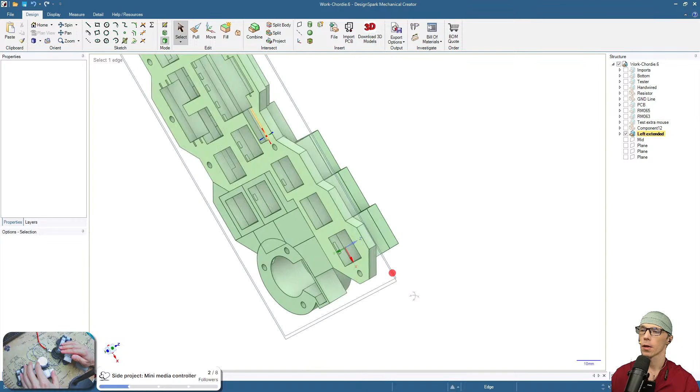Another thing is that previously we've been working on new Chordie, new shell. So we did some changes to the left side. We have added these two keys for the mouse, because up until now the mouse keys were over here under the thumb like this, and after some time the thumb can be sore, especially if you do a lot of mouse operations. So I decided to move it, to add those two keys,

and that's the next prototype, or maybe even final version, if all those fit and there are no issues, like no space constraints, and if it's okay to use the forefinger for that. Looking at it, it should be okay, but you never know until you build it.

But there is one more thing which might be problematic, and this thing is this. Let me show you quickly, this little fella. So this is the encoder. I just dropped it like Linus. So these are very nice, and you can find them in many builds. A lot of people are using these encoders, and I've been using it for quite some time. Well, back in the day, they were abundant, and there was quite a lot of them.

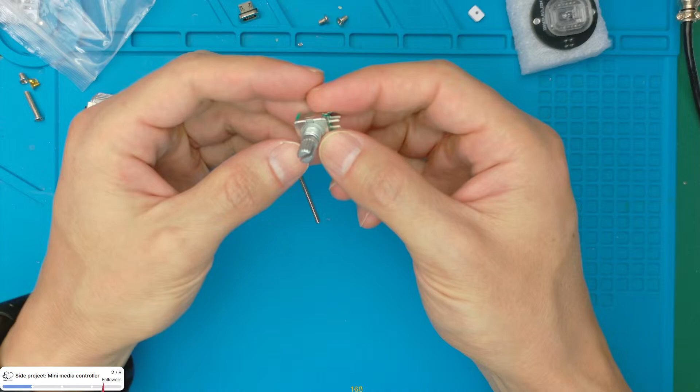So the first one will be this. So this is a simple rotary encoder, just like the normal ones, just that this one is 90 degrees. So as you can see, it looks like this. And you can buy such a knob. There is a bolt inside, and you can attach it to the stem.

Like so. And just tighten it, and that's it. It looks okay, but first of all, it's kind of too big compared to the original. As you can see, the knob is kind of big. But we can either 3D print something, or maybe we'll be able to find smaller knobs to substitute this one.

So that's one thing. And another thing, there are other encoders like this. Maybe not quite like this, but with a small footprint like this one. So I was thinking, maybe if we can somehow find a way to attach it like 90 degrees, and then have some kind of a knob that will go on it. That would be okay as well.

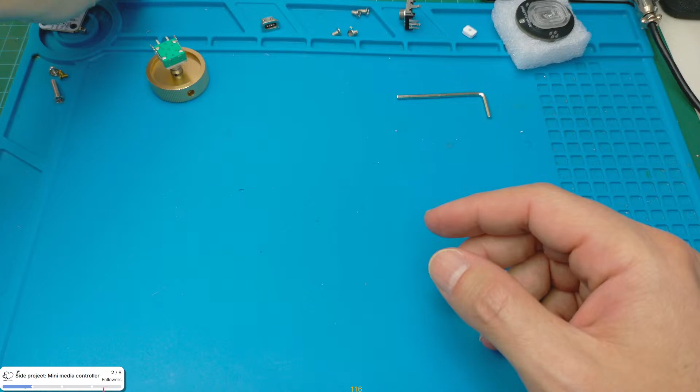And there is one more thing, well, actually two. So you can still get these. So this is like a bigger version of the horizontal one. So actually it's like twice the size. It's very nice, just like this one. But this looks also like an old tech, and I think they will also be gone soon. But the good thing about them is that they are still a good price, the same price as these ones when they were new, or maybe when they started being sold.

And the last thing that I have found is this. So this is some kind of an IC chip that can detect how this magnet is rotated. So if we had it somewhere underneath and a magnet attached to something that can rotate, then this thing can read the rotation of the magnet and could give us a good result. I think it's more accurate than any of these encoders.

This solution sounds like it might be the best one, the most sophisticated and maybe the most accurate. But the issue with it is that, again, we still don't know how long these PCBs will be on sale. And another thing is that it adds complexity. So even though I really would like to have that, I think I will skip this device.

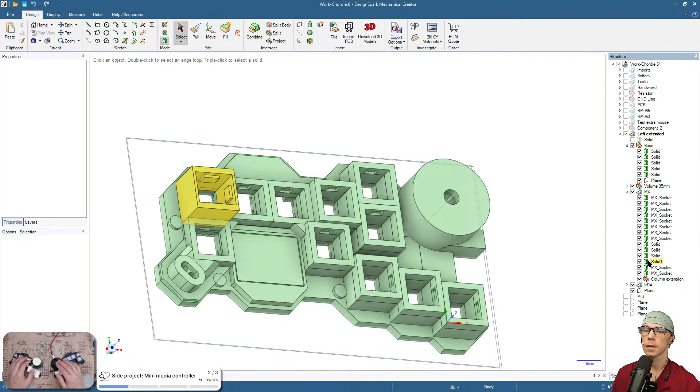So how can we approach this now? Because we'll have to replace this part. Okay, so encoder is here. Maybe I will change it to, so the name was EC11. Let's make it A because it's angled. And I will make it 12.1 by 12.1. And the height was 6.5.

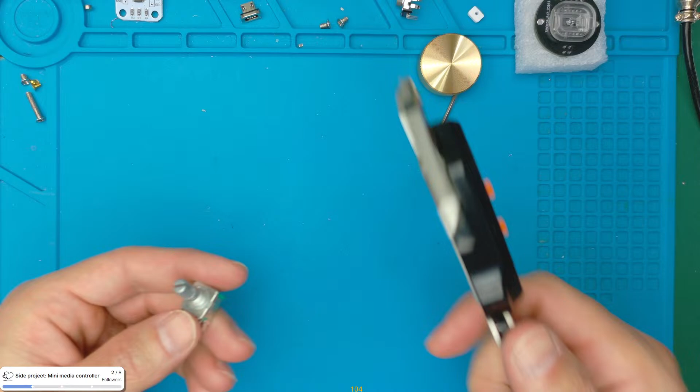And then we make the stem. So this one was 7. How tall was it? Should be 11 or 15. Well, maybe I didn't buy 11. Let's check what's the height on AliExpress. Let's make it 15 for now. No, this is 7. And we can pull it out for 15. Ah, yes, 15. Okay, so I guess that's the smallest one. Maybe we can merge. Ah, it is one body, so that's fine.

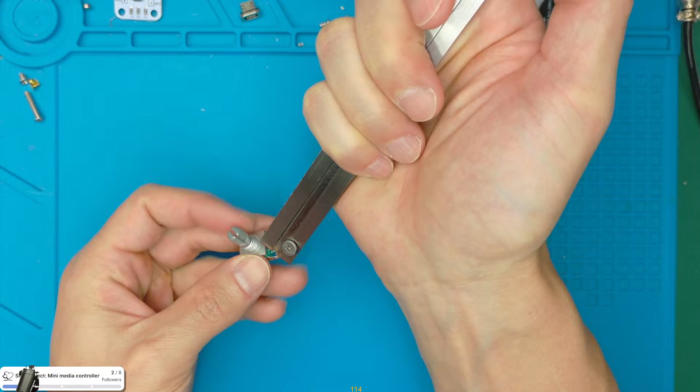Yeah, so as you can see, it's quite big. And we still haven't factored in the legs. It's 4.1. So it looks like one is in the center, like one row. So over here, the middle row is centered, at least it looks like it. And then we have two legs at the back.

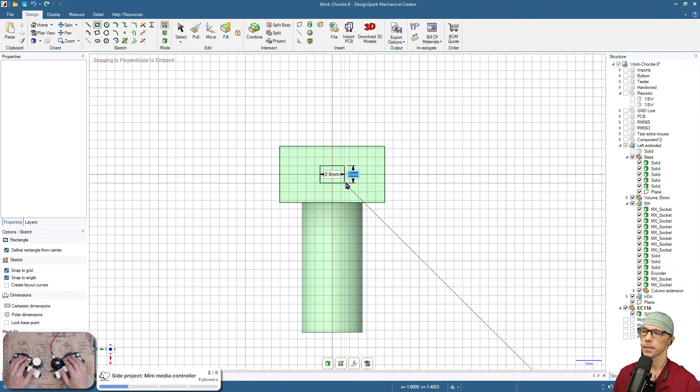Okay, so the legs are 0.8 by 0.2. So we can make a rectangle from the center. So we have, this is 0.8 and this is 0.2. Looks about right. And how tall? 4 millimeters. And what is the distance? It's standard 1.7. 1.7.

Okay, looks like it merged the leg with the whole body, and I don't want that, but that's an easy fix. I can just select this wall, put a plane on it, and then I can cut the body. So I'll cut the whole body with this plane, and this will effectively chop off the leg. So I can remove the plane now.

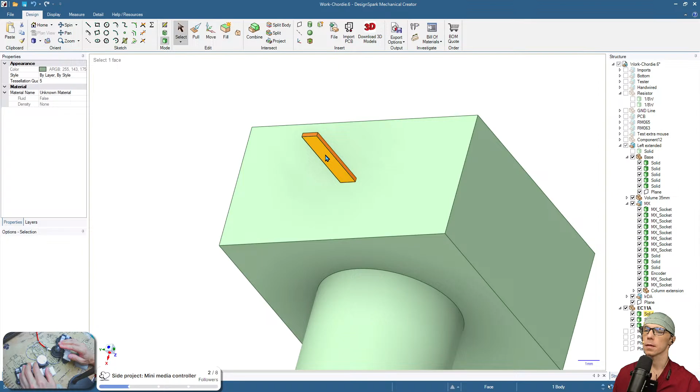So I copy and paste, and now I can move it over here and just do anchor on this wall, and I want it to be 1.7 away from this wall. And one more. And the same, I can just make it move, anchor on the side, and I can use the ruler, and I want it to be away from this wall, 1.7. Okay, we have beautiful legs.

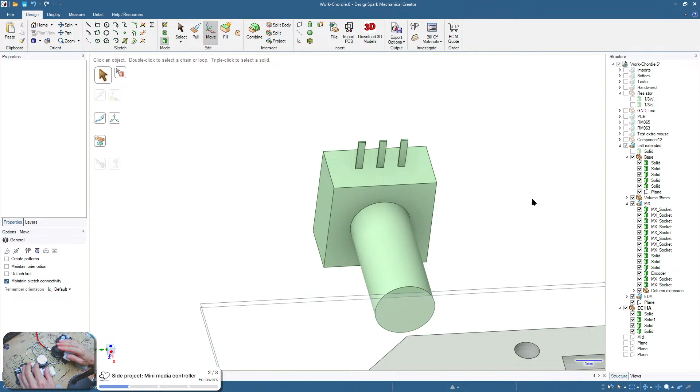And then we have one more set at the back. We have two, and they are aligned. So we have to model these two at the back. What they are aligned with and how far are they. Looks like it's 0.8. Okay, so select this one and this one. I can move them away and then anchor on this wall. Just move them back a little. And I want it to be 0.8 away from here. So it's 0.8. Okay, looks about right.

And then we still have these legs on the sides that are meant to keep the encoder in place. So I think I will make them as well. Looks like it's 2.1. Maybe 2. Oh, it's 2 millimeters. I wonder if this is bigger. Oh, it's 2. Okay, so we have 2 millimeters. And the shape.

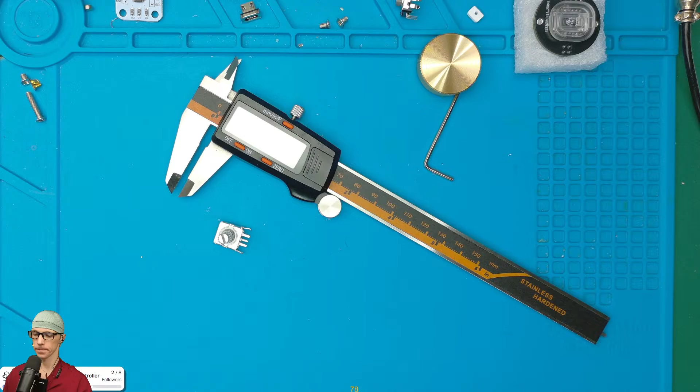And now I can cut with the letter T, or this one, trim away, actually not cut. Sorry, wrong screen. So I just made this shape with a rectangle, and then I just trim away this wall. So we'll see what will come out of it. And what was the thickness? We can make it 0.4.

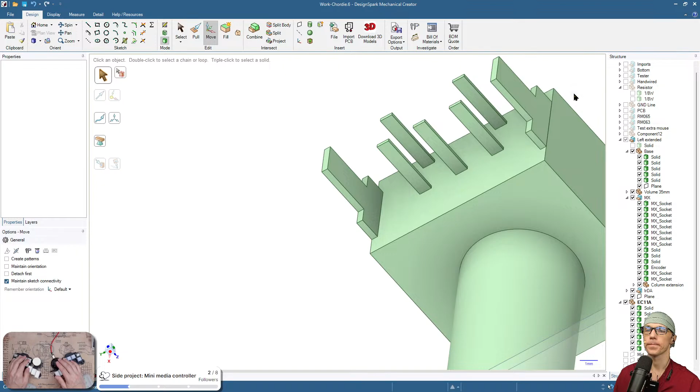Copy and paste and just move it away. Align this wall to this one. Okay, so you have a beautiful encoder.

Before we proceed, maybe you can take a look on AliExpress if they have any interesting knobs for this thing. So let's do rotary encoder and knob. Would be good to have something small with a small diameter. So it looks like this knob is 6 millimeters by 20 millimeters.

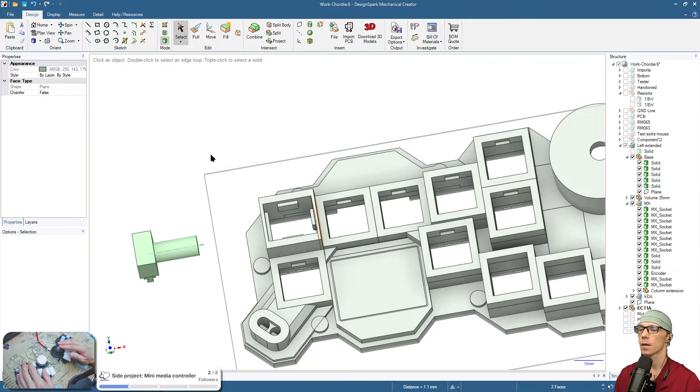But I think the wall over here is rather thin. Yeah, 1.1. And I usually do walls 1.2, but yeah, there was not enough space. And I think here's the same, yes, 1.1. Okay, anyway, so we have this one, 6 millimeters by 20. Maybe we can find something more interesting.

Oh, these are rather big, 25 by 13. So no. How about these? Okay, the smallest one is 20 by 15. Oh, they look nice. And they have this, I don't know how to call it, this engraving on the side that would be good for scrolling. The finger will stick nicely to it.

15 mm. But no, it's not that bad. But 20, so it's 20 by 15. 15 is height. And I guess 20 is the diameter. Okay, so the shaft is 6 mm and the height is 20. But how big is the whole thing? It would be nice if they had more info. Yeah, so the thread diameter is 6.8, height is 20.

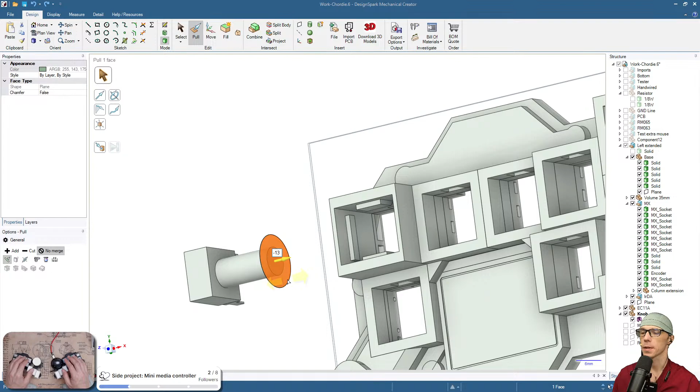Okay, we can do it over here on this one. Let's zoom in a little. So it was 13. Minus 13. Okay, not bad. Not bad. Of course, it will be sticking out a little. I doubt they mention how deep it is.

So it also comes with a screw on the side, like the one that I showed you. Like this one, but that's a smaller one. I mean, this one is bigger, but the one we're looking at is a smaller one. Maybe I will put it inside the encoder, so that will be easier to move. Okay, so let's hide this one, the socket for the encoder.

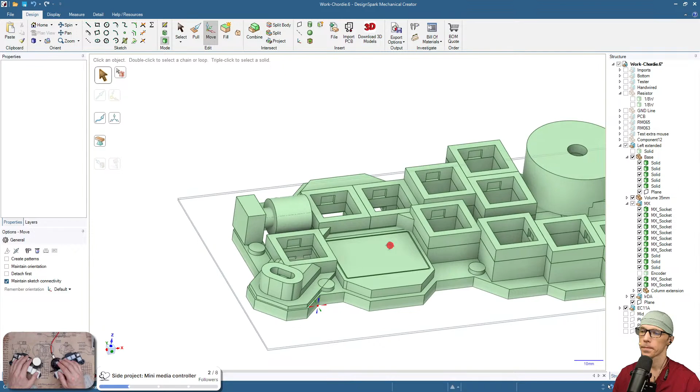So I would like to have this one in its position, but I would like it to be, let's make it 1.2. So 1.2, that will be the wall. And from the wall, maybe we can do it 1.4 in total. So that will be 0.2 away from the wall. It looks like we'll have to do a lot of adjustments to the base plate.

Well, actually, you can make it look a bit symmetric. So we have infrared sticking out here, and then we can make this one sticking out here. So this will look like Mickey Mouse ears or something like that. And we will leave this space empty. So maybe it won't look that bad.

But still we have to figure out a way to mount it. Well, technically, we can push it from the bottom and make it clip in with those legs. And then when the bottom plate comes in, it will lock it. So then even if there is pressure from the top, it won't push it out. Or maybe, so we have like two options, or maybe even more than two.

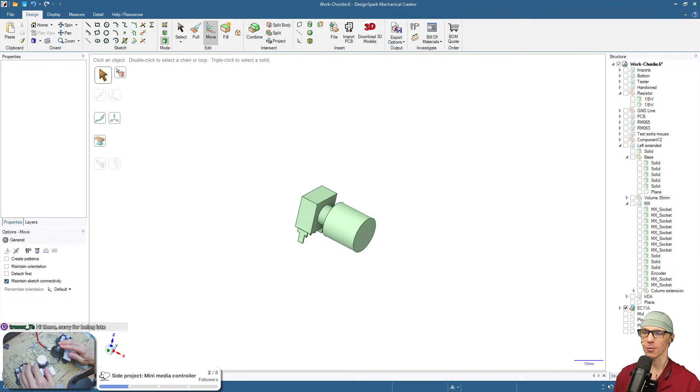Okay, so there is also the shaft over here. So we need a way to mount it somehow. It would be best if we had like a wall with a hole where we can put it, because these usually come with like a screw on top, so we can lock it inside the wall. But then it will be difficult to make enough space to push it up.

I can quickly make a mock-up, maybe. It will be easier to show. So if I copy this wall and this one, and copy this one, just to show you what I mean. Yeah, so it would be best to have a wall like this, where the shaft will go through. This will lock it in place. But then, of course, we will need a lot of space over here to be able to push it inside. So obviously we can't have that.

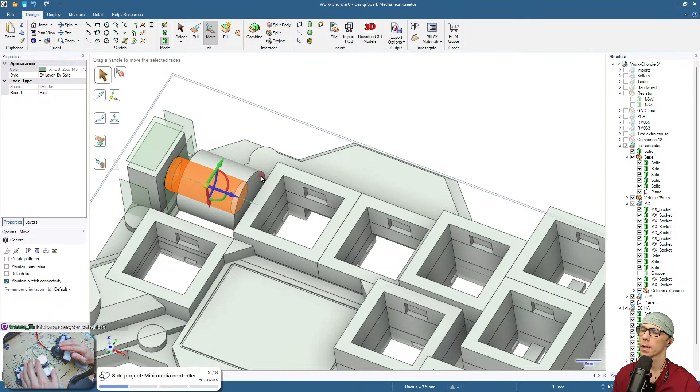So pushing it from the bottom seems like the best idea, at least the best I can think of at this moment. Most probably when I sleep on it, I will have an epiphany, and then on Monday we will redo everything. But for now, I think that's a good option.

Especially with those legs at the bottom on the sides. They would maybe help to lock it in. And then we can add additional constraint with the bottom plate. So that would keep it in place. Because when we will be scrolling, there will be a lot of force. And most probably it will still be able to crook it a little.

So I guess we can't get away without having a hole for it. Well, we can try. We can do a first mock-up without the hole, just to try to slide it in and see if it locks and how sturdy it is. So I will hide everything else.

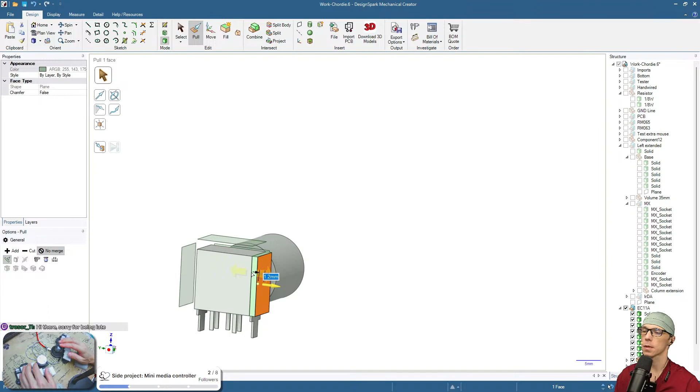I will remove that, and I will just copy and paste this one, move it, and just make it away 0.005, like this. Okay, this one. Let's make it 0.005 as well. And pull it all the way to here, and the other side as well. Okay, and now this wall.

And we can make one big rectangle over here. Okay, I think it made all the surfaces separately. That's not what I wanted. This surface, I don't think we'll be needing it. Oh, I will leave it for now. It won't hurt. Because this is all 3 different bodies, so if I make a surface here, it will only cover this area.

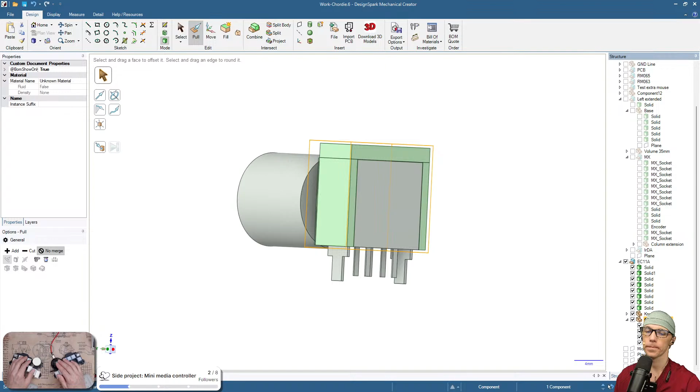And if I want to have it above all of these, I can make a new component. Like so. And now I can just do a rectangle from here to here. Well, actually, maybe I can go all the way to the bottom to accommodate the legs. Okay, we'll see how it goes. I make it 1.2. And I think I still have to move it minus 0.005 to leave some space.

Now I don't have to activate these. I can just move these walls. So I can do up to here and it's fine. And it won't bind them together.

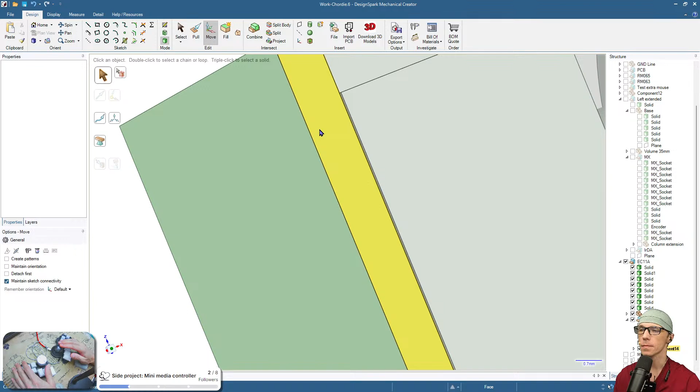How was your day, Trezor? Busy at work that you're late today? Oh, day off. That's nice. So what can be better than Friday? Day off on Friday.

Okay, I will extend this as well.

No, night shift? I don't think so. I'm not a fan of night shifts. They will always mess you up. Difficult to get back to a normal rhythm after a night shift.

Okay, so we have these legs, and they have this bump over here, this one. So I was thinking, if we make a hole, maybe it will lock in inside. Not quite sure how tall it is. This is 3.4. Okay, we have to extend this maybe by, let's see, 1.2. Looks like it's gonna be enough. And this one as well.

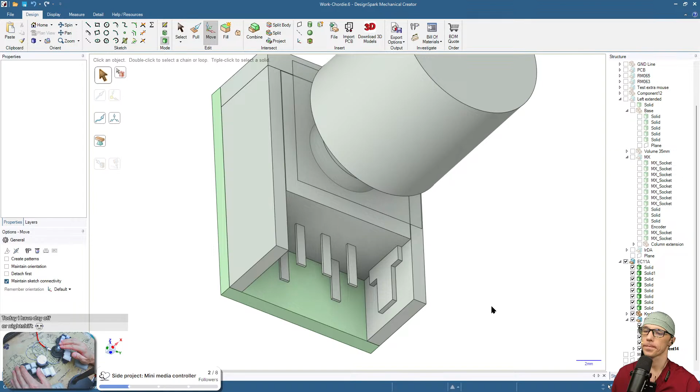Okay. So maybe now I can do it like this. Enable the whole body. And maybe we can cut a hole to fit this inside. So it will kind of clip in, hopefully. We can give it some more space. Okay, it's not touching. So we don't know how far it is.

But that's not a problem, because what we can do, I can hold Control, select this wall, and then I can project it. This is project to sketch, and this project is a different one. This one is when we are on a sketch, and this one is for 3D bodies. So we already have the wall we want to project. Now we have to select the target face. I want this one, and then hit OK, and then we can proceed.

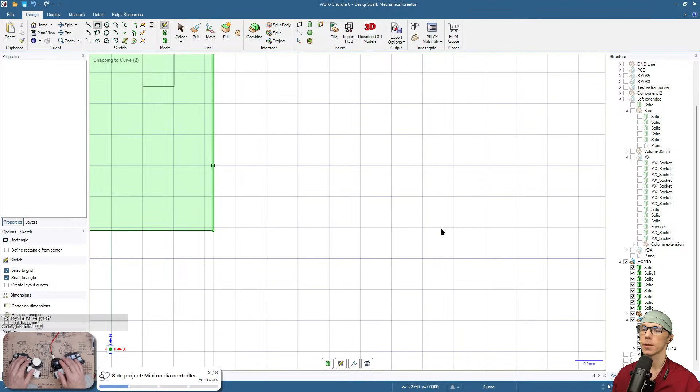Oh, there you go. Okay, so this is a one-to-one shape. So we need a little bit of a margin around, and I can do it with this tool. We can offset. So if I double click, why can't I edit this?

Let's hide this one for a second. How did it project? Oh, no, looks okay. Let's do it again. Can I select this? No. I wonder what's wrong.

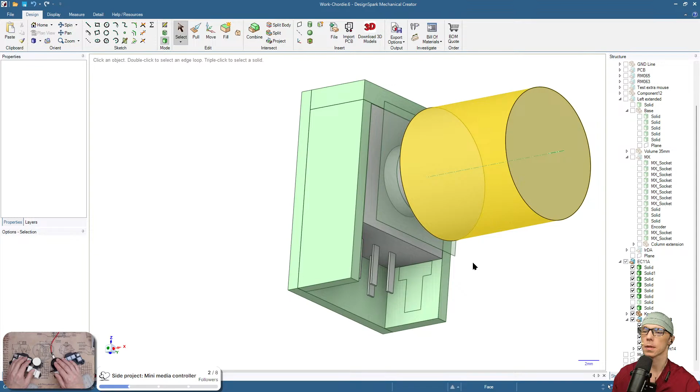Okay, never mind. It should allow me to sketch. Not quite sure what's happening here. I don't think... it looks like I am on this plane and not on this one. Is there like a surface somewhere? Doesn't look like it. Okay, one more try. No. So the green area that is showing is basically the piece that we can edit, but that's not the piece that we want.

Yeah, it looks like it's okay. Okay, the angle is fine. That is interesting. Simple things, and we have problems as usual. This is how it looks. Not everything always goes smooth. Okay, if I pull it, okay, that's fine with me. So maybe now I can do something about it. Okay, so now I can offset.

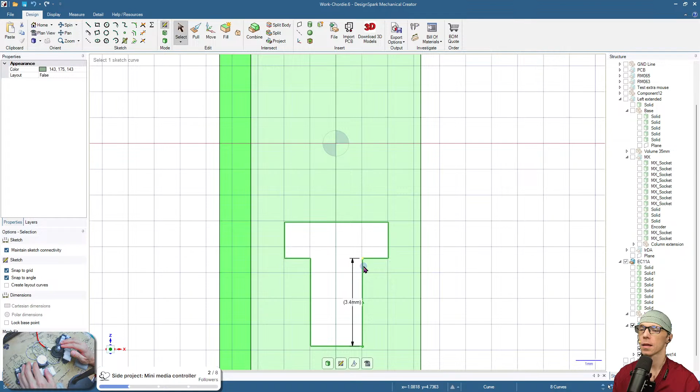Let's do one more thing. So actually we want this piece to go in and be locked. Looks like it's 2.6, 2.8. So let's make it 2.8.

Okay, but we actually want this one to close. Okay, let's see what happens. Okay, so I will close this part. Oh, I also projected it on the other side. And that's fine. We can pull it, and then I will just copy and paste and move this part.

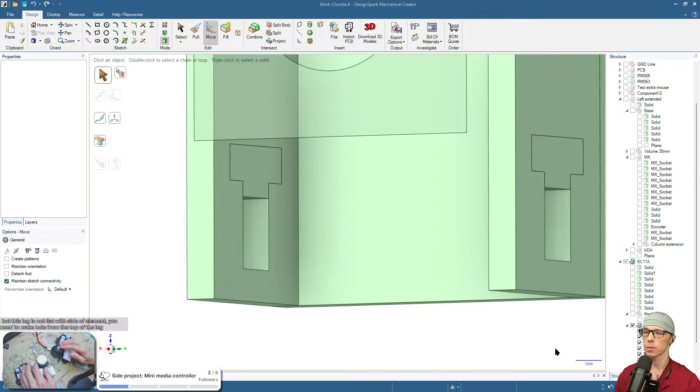I think I should put it in one body because it's getting messy. Let me quickly combine. It will be faster if I do it like this. I can just select all of the pieces and press I, and we have one body. Okay, what I wanted to do, I wanted to slide it like this. So it will go all the way, and over here, this leg should clip into this hole. At least that's what I'm hoping for.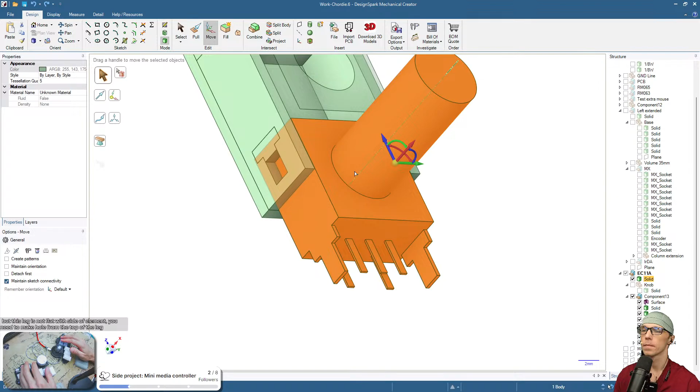So I think I will leave it for now. And I will just remove this wall. I can hide the knob. Okay, we have a surface over here and one more. Okay, this one won't be visible. So this is something like a harness for the encoder. Let me save it. Okay, I think I can try to print, see what happens. Let's quickly fire up Bambu Studio.

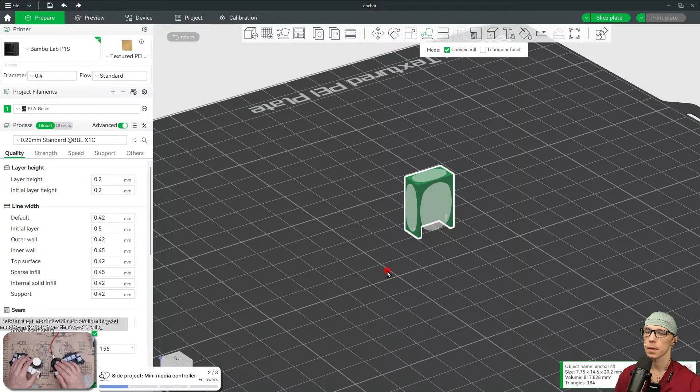Let's put it on its back. Okay, so this is my default profile. So we have 3 walls and speed to the max. But most probably it won't be very fast because the shape is small, so not enough time or not enough space to speed up. Okay, I need to start the printer.

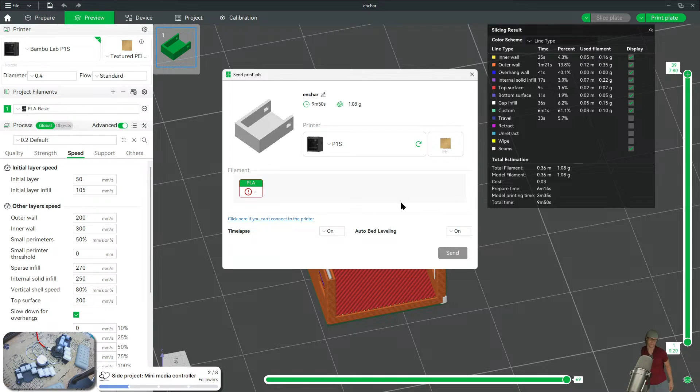It seems like it's on. Let me check. Oh yeah, they changed the UI a little. And now I can send it still. There's no filament. Not sure if it's working or not. Okay, so it's on. Why is it not sending? I knew I shouldn't have updated the studio. It's always a bad idea.

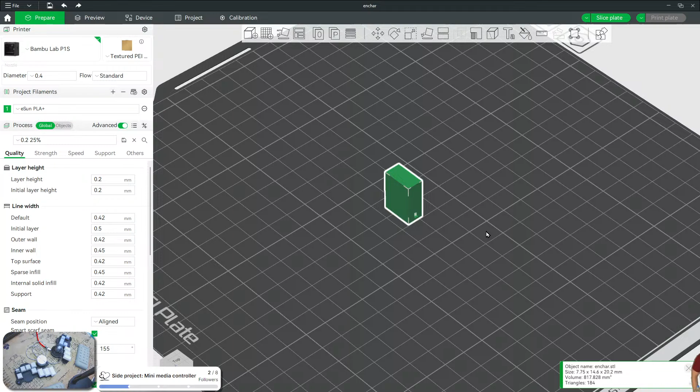I will try loading the filament again. Yeah, it says it's busy now. So I don't understand why it doesn't want to print. Okay, so the filament is loaded. And still cannot send. What the hell is wrong with this? Finally. What the hell was that? I think I'll have to recalibrate it later. Okay, we have a preview. Technology at its best.

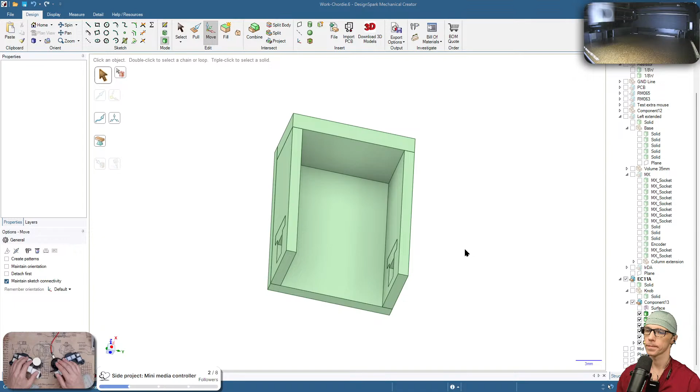The issue is I have a pretty old filament, but I kept it in the dryer today, so maybe it will help a little. I hope it won't break during the print. It's gonna take more time to prepare for the print, to warm up, level, and do all this stuff. And the print will be like 1 minute.

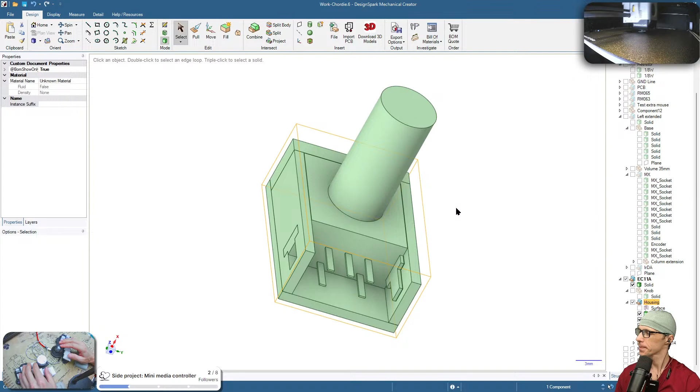Okay, let's change the name for this one. Let's call it maybe housing. Not sure if it's a good name, but for now, we can keep it like that. I should have skipped bed leveling. I don't think it's necessary. Okay, let's hope it won't fail. I usually don't have much issue with those printers. There was some drama with the firmware recently. Honestly, I don't know how it ended. Okay, there she goes.

No, I should have printed the knob as well. Maybe we can make a hole in it. It was like 7.1. Or was it? Let's check again. Okay, shaft hole 6 millimeters. And what did we measure? Okay, so it's 6. If I make it 6.1, would it be okay? Maybe let's make it 6.15. Let's make it 6.2. It will be easier to put it on.

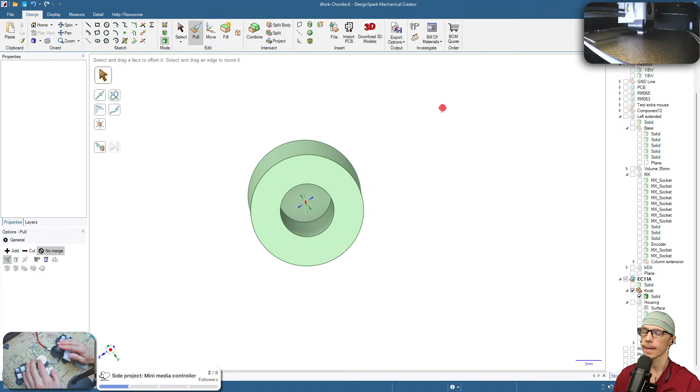Okay, and let's pull it all the way to here by 1.2. Forgot to change that. I want to cut. Okay, again. So I want 1.2 from the top. Okay, beautiful. Okay, we have a beautiful knob. So next time I'll add it to the print and we will have a mock-up.

I wonder how it's gonna feel with this encoder. I'm a bit worried that this part might be getting in the way. But then maybe we can use a bigger knob, like maybe 20 or something like that. I think there is some space left. We can always move it around so that it is bigger than the shape of the encoder.

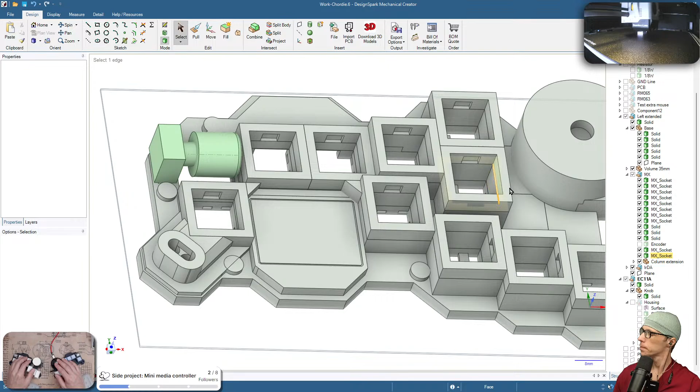Looks like it's finishing soon. Yeah, with this housing, it doesn't look that bad if it could only keep it in place. Well, maybe we can do something like a support. If we cut it in half, I mean this wall, I would like to hide the knob. Something is off. Okay, I would like to cut this in half.

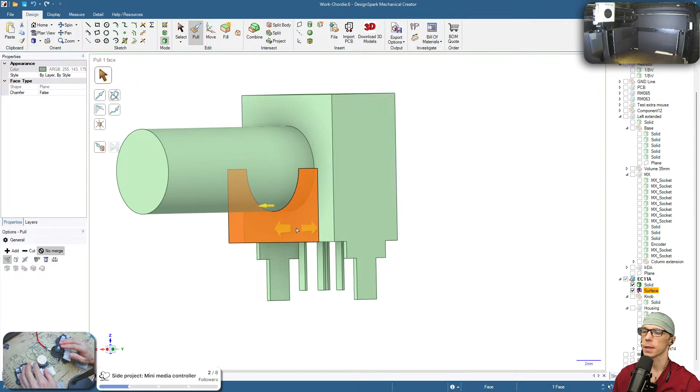Okay, so I think I have to do the full shape if I want to cut it in half. Okay, I don't want this one. Okay, do I have two or just one? Okay, that's the bottom. This one we don't need. Okay, let's do it like that. So maybe if we have something to support it from the bottom like this.

Let's make it 0.2 maybe from here. Well, actually no, because it's a bit thicker on the bottom. It's 6.9. I think 7 will be good. I already did 7. Okay, that's fine. So if I had the base over here, yeah, this could work. This could support because the shaft is rotating. I mean, we can still grab it here and it won't limit the rotation because the shaft is more or less like this.

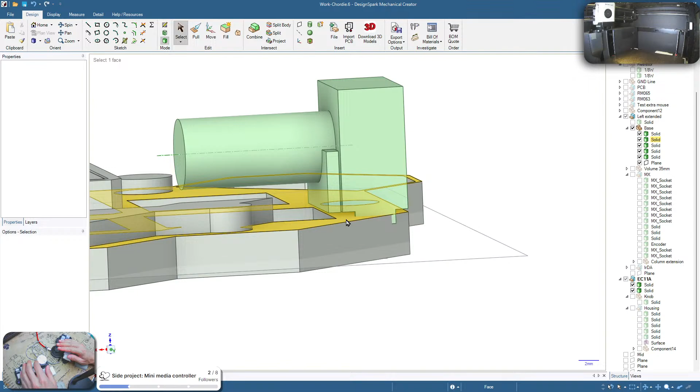So this is where the thread is. So this part is not moving. This one is moving only. So technically we can model it a little bit different. Looks like it's 4.8. And then from here, we can do circle, which will be 6. And I think it will be 15 in total.

Yeah, looks about right. Yeah, so this part is not moving. So we can have a support over here. So when you're pushing with the finger from the top, trying to rotate, this could prevent it from like moving. Let me just go and pick up the print.

Okay, so it looks like this. And if I slide it, it's too soft and too small. It's almost okay, but the walls are too thin. As you can see, everything is flexing. Yeah, but if it was holding, maybe it would be okay.

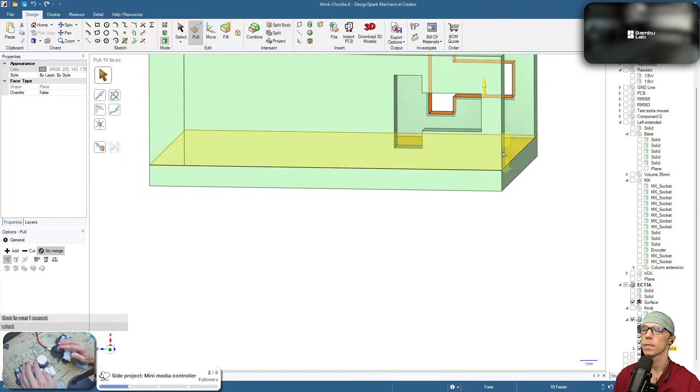Maybe I should enlarge this. I should enlarge these holes. Maybe 0.1. Okay. I think I'll remove this one as well to make more space for the leg. Let's make it 2.1. Thicken the walls a little.

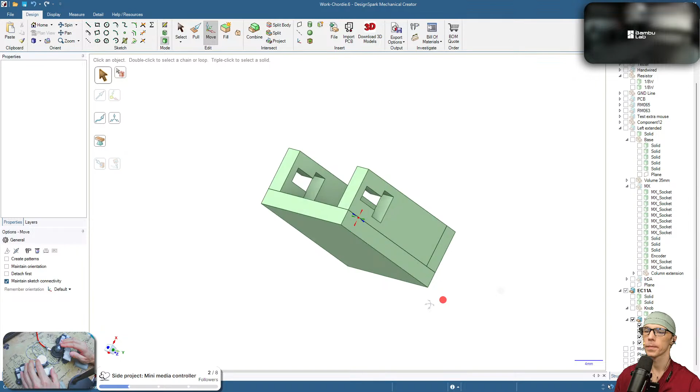I hope this will be enough to hold it. Any suggestions, Trezor? Okay, better. Seal of approval.

Okay, so let's print. I will skip bed leveling. It will be faster. I hope it will be faster, unless it breaks halfway.

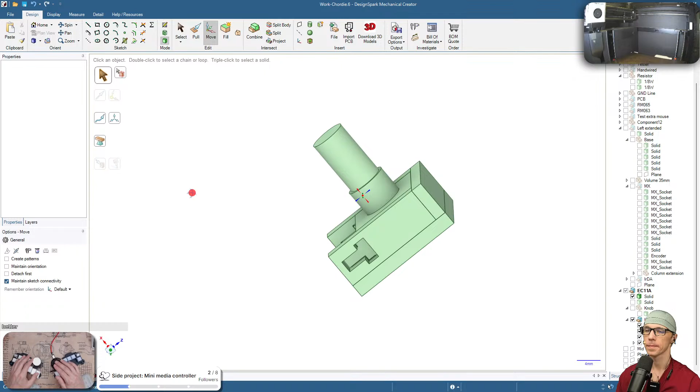Yeah, I have modeled these legs flat because it would be too much trouble to make it bend. I mean, maybe not that much, but still I don't know what's the correct dimension for that. So I just left it flat, and I know that I just need to make a hole for it. I was supposed to add the knob and forgot, as usual.

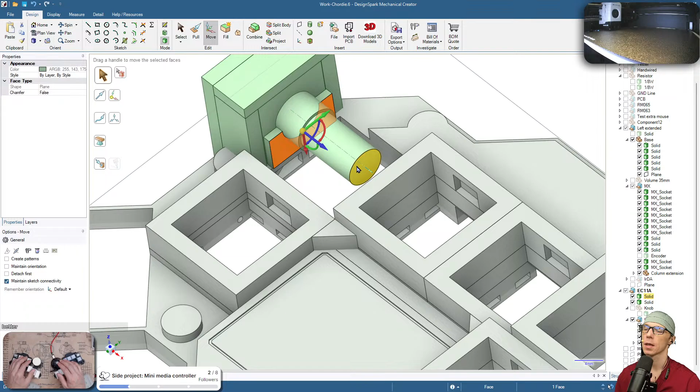Well, this support that I was thinking about, well, it won't really help much, because how do we put on the encoder? We won't be able to push it in, unless it will be like a clip in something that will be able to push from the bottom as well. Well, actually, it might be something that will be coming from the bottom plate. Yeah, that makes sense. So it will be all the way to here.

Let me just grab it. So like all the way to here. So when the bottom plate comes in, that looks like this. So this will be part of the bottom plate actually. Like this. And we can move it a little bit to here to make it thicker. Yeah, so that would come from the bottom. Well, then we will need a clever way to route all the wires.

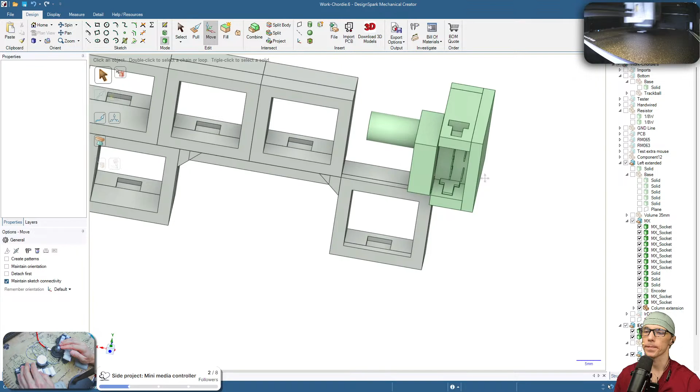All the way from here. Well, that should be doable. We will make enough space over here, and maybe we can go from here, or just like around, something like this, like from here, maybe all the way to here, or maybe a few wires here and the rest through here. But then we have a screw over here that will be difficult, and I don't want to move it.

And also this place is crowded because there are two resistors. One is here and the other one is here. And then there are wires for the infrared that go all the way to here. There's like 4. There is ground, VCC, and signal. Yeah, so 3, because the ground is common. Yeah, so there's a lot of wires over here. So it would be better to go this way somehow. And if we can make it like this, or more or less, yeah, so this should give us some space. Okay, print is going fine.

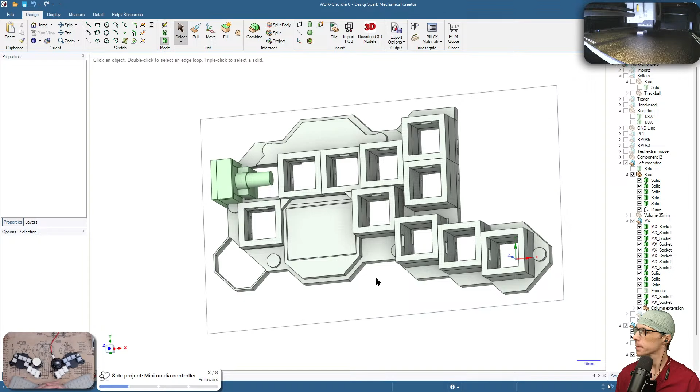I was also considering some touch-based solutions, but touch never really worked well for me. I personally don't like touch things, even though I have infrared over here. But this is a bit different. It's not like a normal key, and it's very easy to trigger. So my implementation is okay, and I'm using it every day on my other keyboards. So this works fine. It only triggers a layer, so that's fine. But if I was to have a scroll that is touch-based, that's not my thing. It's never accurate enough.

What are the other knobs that we just saw? Okay, so these are 13, but they also have bigger ones, 17 by 15. Okay, this one is okay as well. So 13 by 13, 17 by 15. Okay, so we can quickly make one more. The one that we just did was 13 by 13, so let's change the name to 13 by 13. And we can copy this one, make a new part and call it knob 17 by 15.

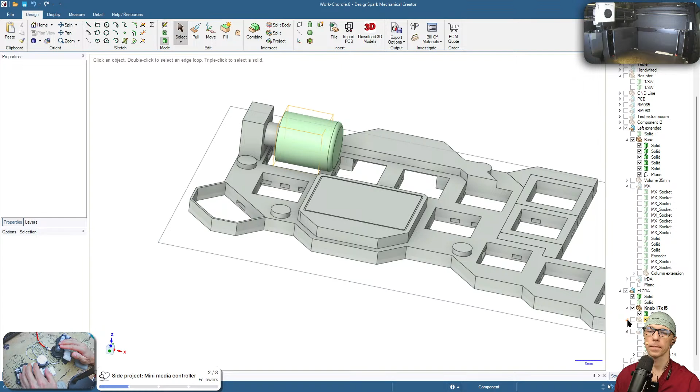I can see that the print finished. Let it cool down for a while. Yeah, so 17 is a little bit too big. I mean, as long as we want to stay over here, we can still move everything and make more space.

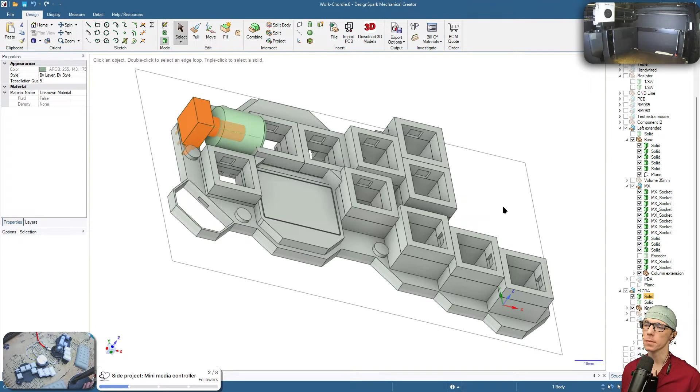Also, I wonder how it's gonna look with the Choc switches. Once we have a good housing for it, we can print both versions for MX and for Choc, and compare if it's not too big for the Choc. Well, technically we have no choice. There is no other good option if you want to have an encoder. And without the encoder, this keyboard won't work. It's a must, especially when the mouse is integrated as well. I will try to pull the print.

Okay, here we are. So it didn't print too well. Let's see if it fits. Quite tight. Okay. Yeah, it holds. There's a little bit too much space because it's moving, but that's not bad. It's okay, it holds. I don't know if you can see it, there's a little bit of wiggle room. About 1 millimeter, 1.1. Okay, let's try it, and this time I will print all the knobs as well.

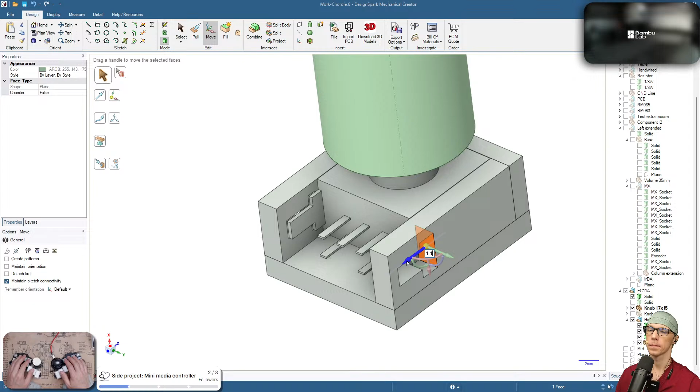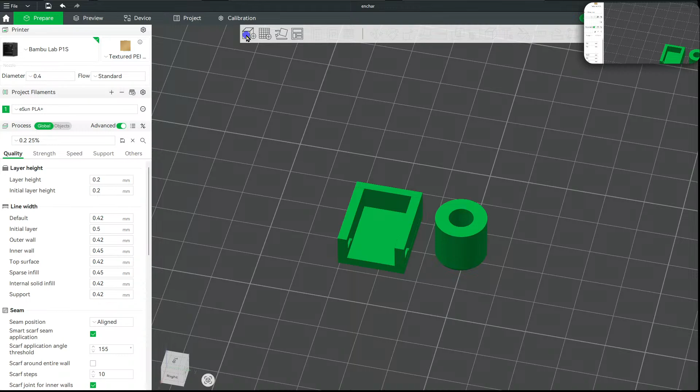So it looks like we have to move this wall by 1.1. Okay, and don't forget about the knob. So that's the 17 by 15. Let's call it 17 by 15. And this one is 13 by 13. Let's move this one a little, and the bigger one. Okay, slice and print.

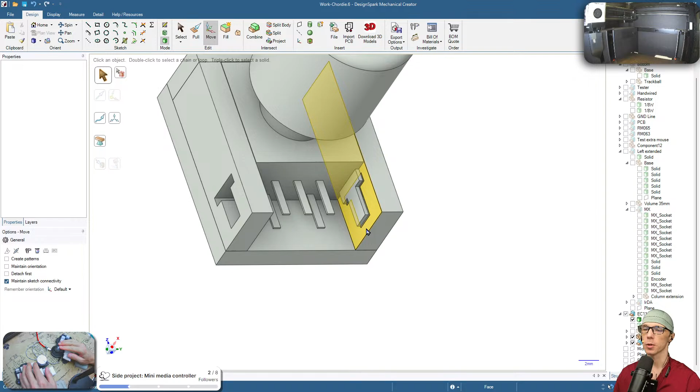Now this one will take a little bit longer because of the knobs, and that's fine. Now I have this thought that maybe we can add something to block the leg over here so that it will clip in, but it will be more difficult to pull it out. Something like this. That's 1.15. Okay, let's make it all the way to the bottom. Like this. So the leg will go in, and then it will be more difficult to pull it out.

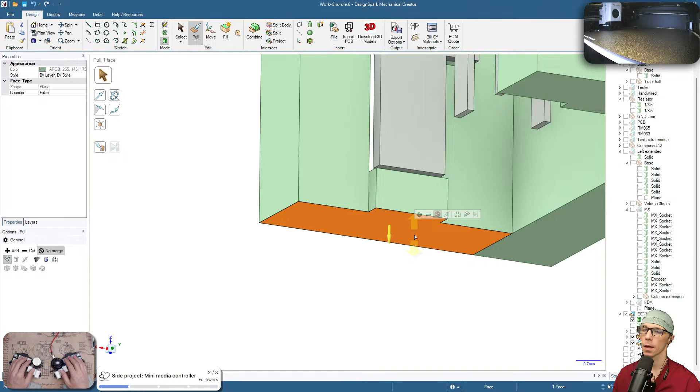I will also make it 0.05 bigger, so this whole thing will be 1.2. Yeah, 1.2. Looks okay. It might help a little. Maybe we can get away without this support if the lock is strong enough. Also, I think it's possible to add some WD-40 on the encoder to make it easier to rotate, because this one is kind of hard.

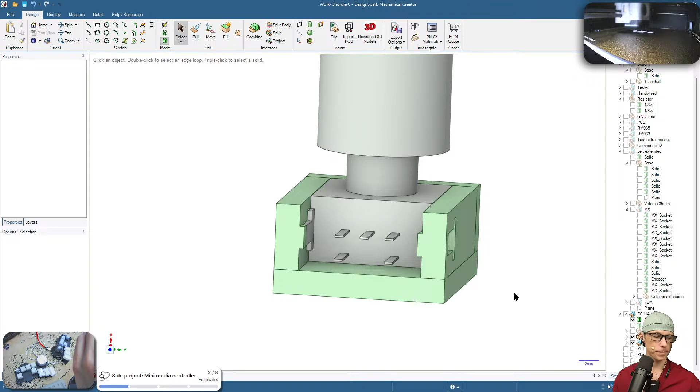I think I had this misaligned a little because they are not in the center. They're actually from the back. So this wall is with this one. I can fix it later.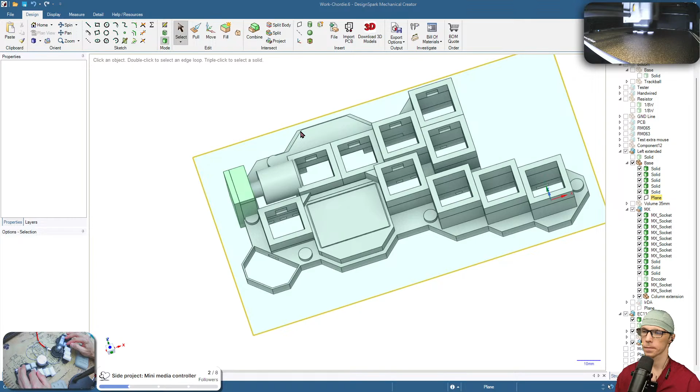What other sizes can we find? Oh, 25 by 15. Oh, this one might be okay. 25 by 15. So it should be big enough to cover the encoder, so when we are rotating, the finger won't be touching the encoder, maybe. That's a good comment. Good handle, but did not fit. Let's do 25 by 15.

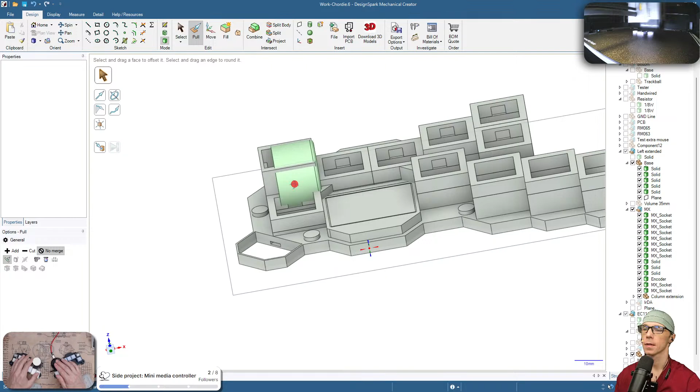Oh, that's huge. Yeah, but with MX, it might work actually. It's a bit big, like it's taken from the bottom. So maybe too big. We'll have to make a hole in the bottom plate, and I think it will be still touching. Yeah, but we can also lift it higher, so it doesn't have to be this low. Well, it's something to consider.

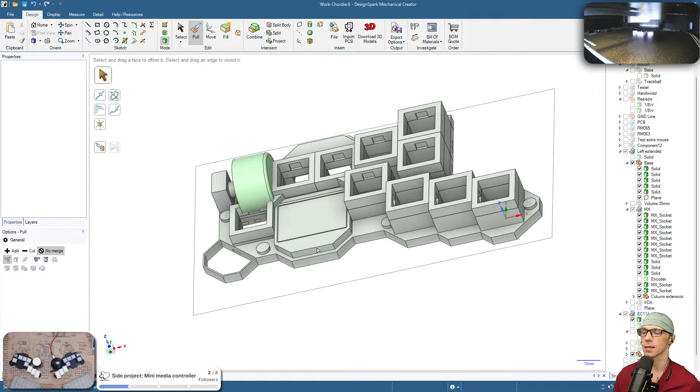But looks nice. Would be cool to have it this big. It should be very easy to rotate because there will be a lot of surface for the finger. So yeah, it might be actually a good idea. We can also make two versions, maybe for MX, because MX will be taller. So we can have a bigger knob, and for the Choc, we can go with the smaller one with the 13 or 17.

And we can also adjust the height, how the encoder is mounted. So for the MX, we can lift it a little bit higher because the knob will be bigger diameter. And for the Chocs, we can have it lower.

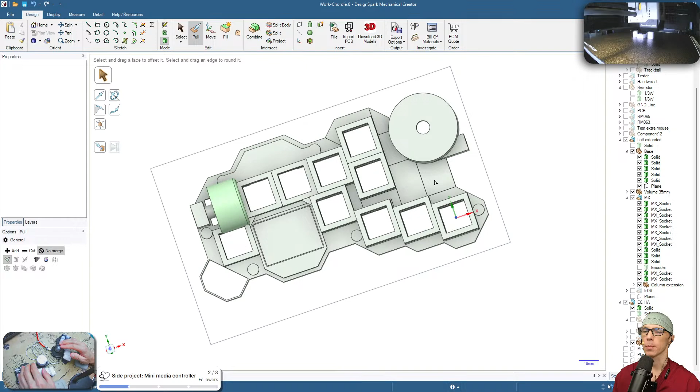Still not quite happy about this one. Yeah, but with this part, I can't really do much because it will look odd if I remove this part or if I even cut it in any way. Well, something to consider for later, but I guess it will stay like that.

But I was also thinking maybe we can try to do some other knobs over here, because the one that I chose for MX, it's okay, but I think it's too tall in general. I would rather have it more flat, but bigger diameter maybe. Even though I complained last time that I don't want bigger diameter. It's a difficult trade-off to have it sticking up a lot or to be bigger in shape, so that would extend a little bit further away.

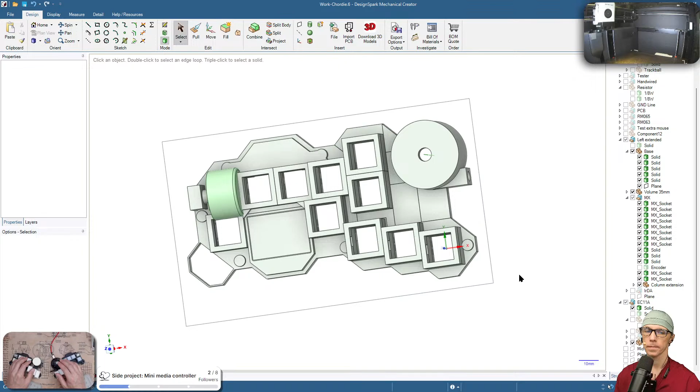Okay, the print finished. Let's give it a while to cool down. Okay, so I'm back. So we have our beautiful knobs. Well, they kind of fit on this one as well. If it was D-shaped, not round, maybe it would work. Okay.

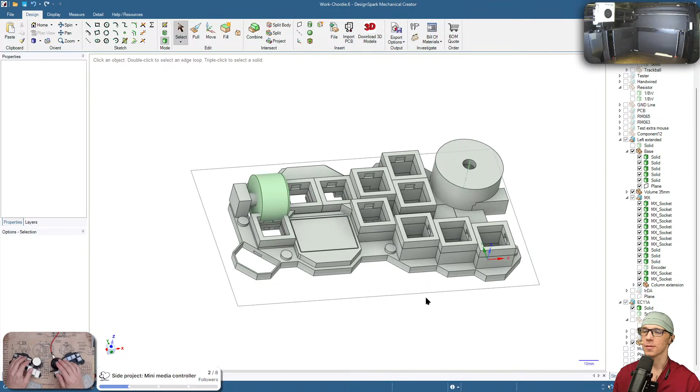It would have been easier if we just stick to the old encoder, but as I said, I don't want to make the keyboard dependent on it, because as you could see, they are very difficult to get now. No one will pay $40 for one encoder, and the keyboard needs two, so that's 80. That's not worth it, definitely.